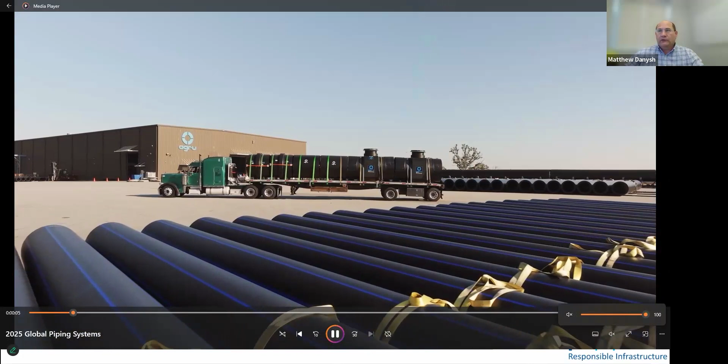Hey, my name is Matthew Danysh. I'm with Agru America. Agru America is honored to be a sponsor of this PE Alliance webinar, and we appreciate the opportunity to tell people about us and about using HDPE pipe. HDPE pipe has been around for a long time and is going to continue. It's basically the only pipe system that's actually growing, where most other pipe systems are decreasing in sales across the U.S. Agru makes large diameter pipe from 24 inches up to 10 feet in diameter for ocean going transport, putting on any kind of truck and shipping it all over the country and all over the world.

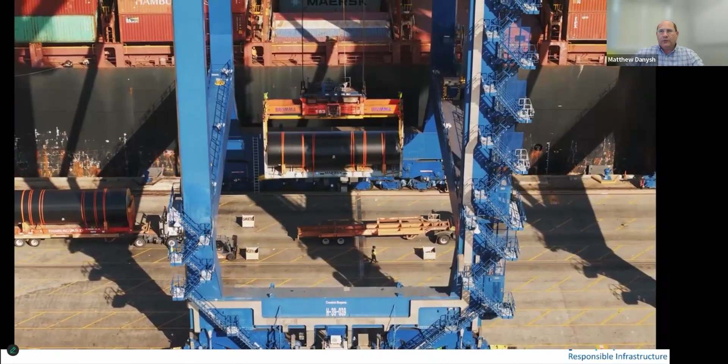Agru's been in business for over 50 years. We've pioneered the large diameter pipe system with the fittings that go with it, including electrofusion couplings and ocean towing across the world and flat racks around the world of large diameter pipe and all different types of piping systems, from potable water to chemicals and industrial plants.

Some of the really cool projects, Matthew, are the fantastic outfalls you've been working on. You guys invited me to your plant last year, and I saw that my first 63-inch DR11 pipe.

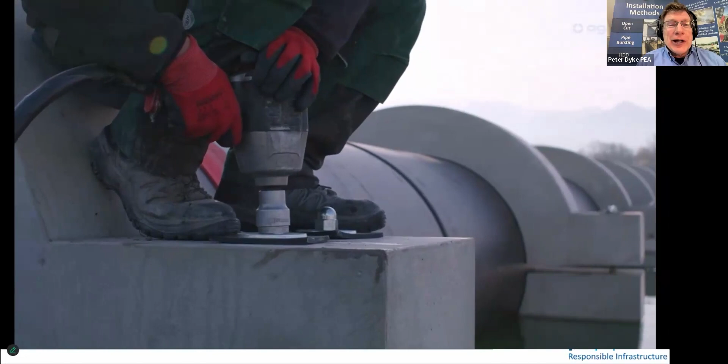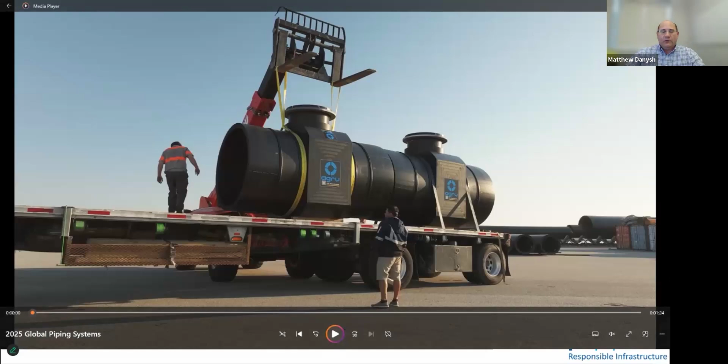Yes, that's another thing—when you're making large diameter pipe, thicker walls is part of the game. So you understand how to make large pipe, you understand how to make thick wall pipe. We first started making large pipe and they said, hey, we can actually make smaller diameter pipe in a great thickness material with higher pressure requirements. So now we're able to expand the AWWA range from SDR9s up to 63-inch.

That's fantastic, congratulations on that. We've talked on this channel a lot about why you have the ability to do that, and that has to do with low sag resin. So we take those resins and extrude them to that thickness, but you've got to hold that thickness. That's kind of half art, half science, isn't it? That is right. It's something you have to understand—how the plastic flows and what it does when it starts to cool. So you have to not only cool it, but hold it properly during that whole process.

We get a lot of engineers on this webinar program, Matthew, and they don't necessarily always pay attention to why—what's the technology behind our ability to make thick wall pipes. But guys like you that educate us, we're so thankful for, because many engineers want to know the why behind the product itself. So that's one of the reasons we do this. Thank you very much.

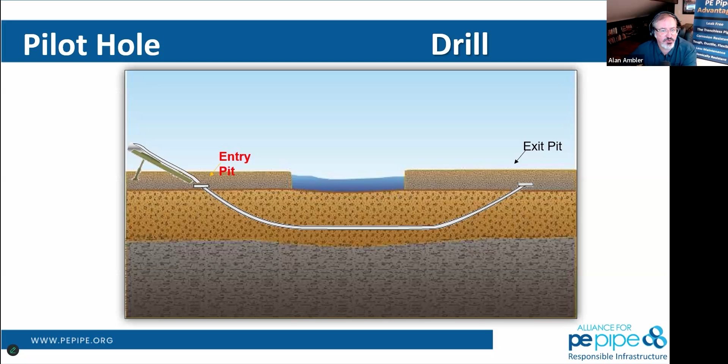Correct. Yeah, normally for a larger diameter drill like the one you're showing here, under a body of water, you would have all that geometry and surveying done before you arrive. And you'd set up either a wireline grid or a gyroscopic locating system. And then the drill rod and the steering tool, as you're shown here, would use that magnetic coil and be triangulated throughout the pilot bore process.

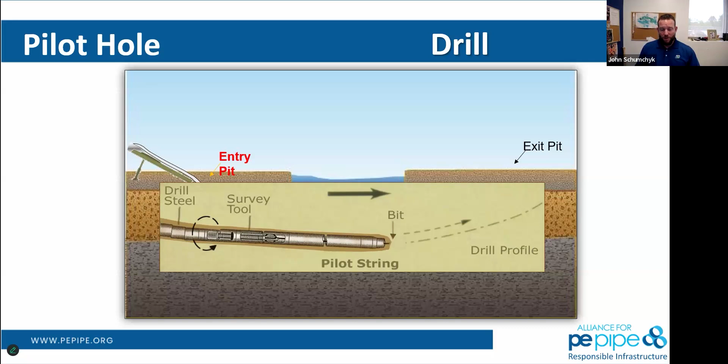So you can, as Alan said, it is steerable. So you're heading down at a 10 to 20 degree angle. When you reach your desired depth, you steer it so it's flat. And then when you want to come back up, you steer it up, and it comes out on the exit side. So it is a very, very accurate steerable process.

Okay, so after that, we expand that borehole, and there's certain mechanisms to do that expansion. Can you elaborate on that process for us some?

Sure. When the pilot hole is done, the pilot tooling is removed, and depending on the size of your product, you install the appropriate size reamer. The reamer expands the ground as you pull it back. And while that's going on, there's drill mud that's being pumped through the reamer. That drill mud actually carries the displaced material out of the hole. So if you'll see here on the back side of the reamer, that large area that's being opened up, all that dirt that was there is being carried back out to the exit side by the drill mud being pumped.

And then it's being sucked up by either a vac truck or a reclaimer, reprocessed to be sent back to the drill so it can be recycled and used over and over.

All right, so that reaming process, we're removing material, correct? And then it stays suspended within some type of fluid, your bentonite or whatever, goes back to a location as to which you're filtering out that material that we're removing, and then continuing through that process. So we're essentially underground taking out material through that, processing it, and removing it from the bore path as we go through.

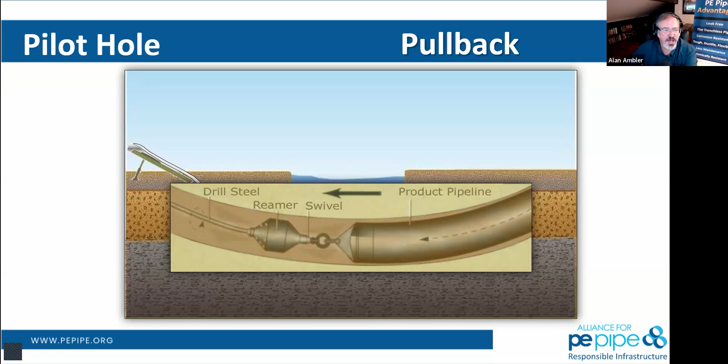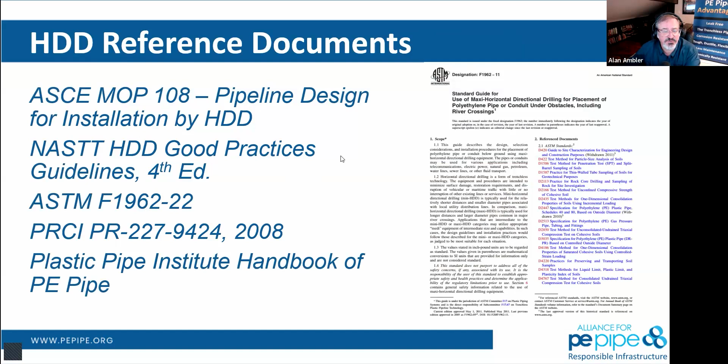There are lots of reference documents covering this technique and these progressions and design analysis as design engineers, before we even get to moving any amount of equipment to the rig. Here's just some examples for you. The PPI Handbook on Polyethylene Pipe certainly gives you good guidance. ASTM standards do give a pretty good guidance for you as well.

And then what that friction force will translate to us is an allowable tensile force within the pipe. That tensile force comes from the industry itself. That's very well known from all of the pent testing, all of the testing to give us the hydrostatic design basis. And then it directly translates right to the allowable pull force for us within the cross-sectional area of that pipe. So again, we have a PSI that is the allowable tensile stress, and then the larger pipe we have, the thicker the cross-sectional area we have of that pipe.

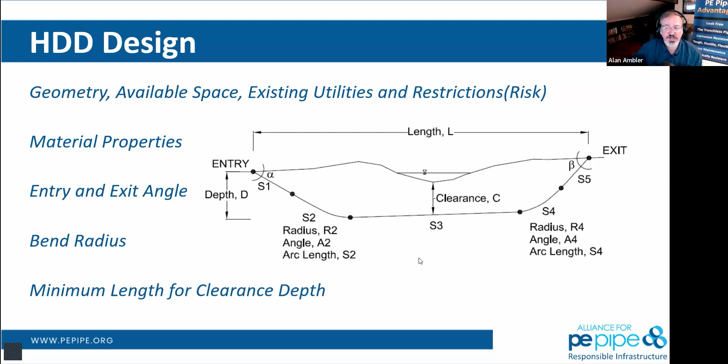So now it translates to a larger force. If we're pulling with smaller pipe, it might not take as much pull force as a larger pipe through that. But these things are all considered when we are designing a directional drill through this process itself, and we continue to go through. So sometimes, John, the biggest thing I see some design engineers do that aren't familiar with horizontal directional drill is to try to have too steep an entrance or an exit angle.

Try to get down as quickly as they possibly can to traverse or cover whatever ground they want. Is that a limitation of the pipe, or of the equipment doing the work for us? Yeah, it's mainly a limitation of the steering tool on the end of the drill rod. The steering tool is probably the most sensitive part of the pilot bore process. It's just a long non-mag connection that can't bend as much as the drill rod can.

The drill rod is steel, you'd be surprised how much it can bend. But the real consideration is about the steering tool at the end. You don't want to damage that, or God forbid, snap it off or twist it off. So the entry angle and the exit angle are two big considerations when designing these bores.

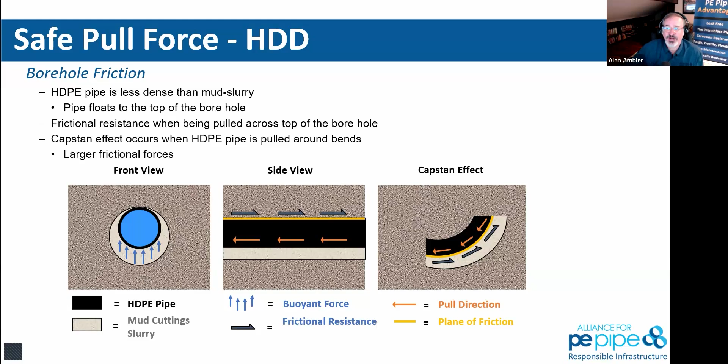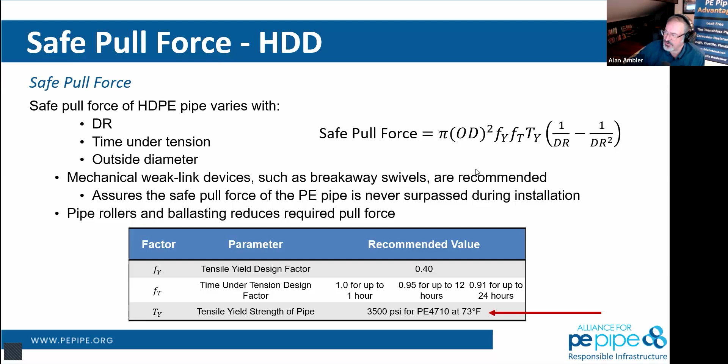The next slide shows what we'd see within the Plastic Pipe Institute Handbook on Polyethylene Pipe for safe pull force. There's an equation for that, and there's also an app for it that you can find online called BoreAid. We may talk about that as well here.

John, you mentioned previously that soil conditions on the existing site make a big difference in how much material is removed or how quickly we can get through things. Something tells me geotechnical is probably pretty important in your plans analysis. Now, if an engineer out there did one boring, or just a simple USGS survey of the soils there, is that going to stop you from doing the drill, or is it just going to increase the price a little bit because of the risk?

Yeah, correct. The more test borings, the better. Right along the drill alignment is preferred, 50, 100 feet in either direction. It could be a big change. One bore on one side is not sufficient. The more information we have, the more aggressive we can get with our bidding. The less information we have, obviously, the more we have to cover ourselves. So yeah, geotechnical exploration is crucial to a successful project.

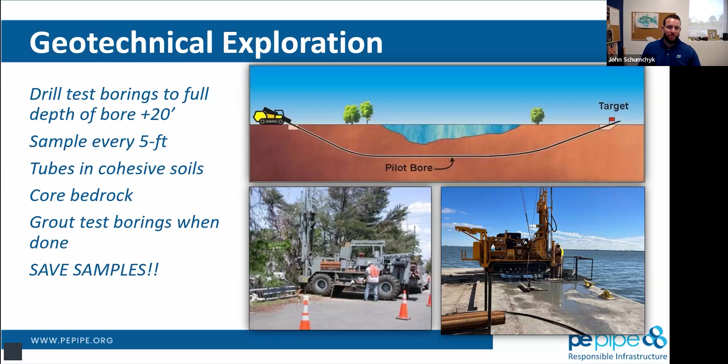We always like to say the more the better, and if you can get borings down 20, 25, 30 feet below where we're going to install, that's preferred, because a lot of times these drills have to be redesigned for whatever reason. Insufficient geotechnical information can really cost the project and the owner.

So that's a boring from which we take samples of the soil throughout. We're looking for changes in condition, because the reaming head's ability to push through the soil may very well change the type of reaming head they actually use through this as well. Can you walk us through some of the risk considerations? I've got another question here for you.

Sure. The largest risk consideration is always your inadvertent release, or IR, frac-out, whatever you want to call it. Essentially, that's when your drill mud builds up pressure underground, finds a path of least resistance, and releases to the surface.

So the frac-out and the IRs are a big consideration in our planning of a project. That's a lot of times what we see when we get a design from an engineer - we'll say it needs to be deeper, or generally not shallow, just to alleviate some of that risk and get the mud to make it back to the rig. If you're shallow in the center under a body of water, it finds an easier path and releases into the water, and you could have a real expensive environmental disaster on your hands.

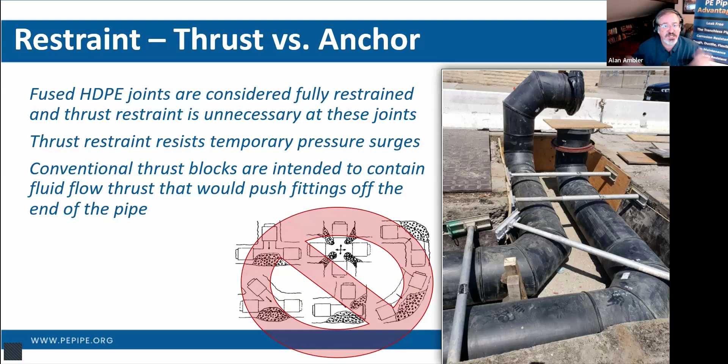But when we're done with the pipe, from a horizontal directional drill standpoint, we want to make sure that it's restrained in its full connection at the tail ends to be able to stop it from pulling out. The mechanisms we have for pulling out from a bell and spigot system on the terminal connections happen to be anchor blocks like you're seeing here, or an electrofusion flex restraint. So you simply put that on the side of the pipe, fuse it onto the pipe, and embed that in concrete. We're going to make sure that any type of thermal effect or Poisson's effect, as you saw in the opening video, does not pull a bell and spigoted pipe system out of its bell and spigot.

Now, of course, big picture wise, you want to be HDPE through the entire thing. However, sometimes design engineers and municipalities want to transition back to PVC, and they would use some of these restraints as we go through.

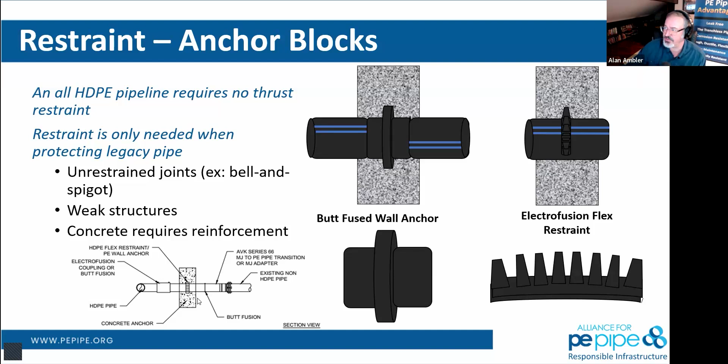You want to tell us about this Champlain Hudson Power Express project? It sounded like it was monumental, and it was a pretty cool thing to work on, especially with the company, right? Yeah, that's correct. So this is the Champlain Hudson Power Express. Can't get really into too many of the details, but I'll speak of what's been publicly released - it's the largest renewable electric project in the country. The general contractor in charge was Kiewit, and we were lucky enough to be selected as one of the 4 directional drilling contractors on the project.

Now, we had roughly 100 drills throughout the center area of the job, all around in and around the Albany area, slightly north of Albany, slightly south of Albany. But it was a great project for us, and yeah, it's coming to a close now - successful on all fronts.

That looks like a heck of a long way to be able to go there, from one location to the next. So that's one heck of an investment to be able to bring all that electricity to New York City and Long Island area.

You're out in Long Island, aren't you? Yeah, exactly.

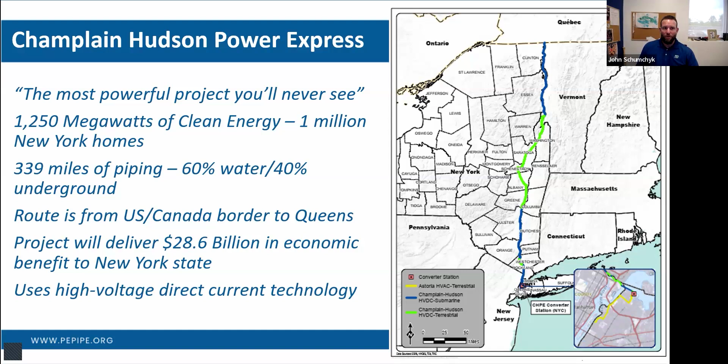Just to be clear, the whole job was not directional drilling. A lot of it was open cut, a lot of it was strung in the river, and the directional drilling was just to get in and out of the river or cross a body of water or sensitive area.

You can't do a project like this without lots of different mechanisms through it. It takes about 6 hours to drive that route, so there's a whole lot of ground to cover, and a lot of interesting project considerations to get from point A to point B.

That technology we have with horizontal directional drill is going to minimize that environmental impact and do a lot of those great things that trenchless really brings to us.

Not only that, but it was pretty aggressive, wasn't it, John? Yeah, it was. All the contractors had a performance clause, and completion and project success was definitely at the forefront in everybody's mind the whole time.

That's a lot of pipe to get in place and a lot of construction to be able to put in a small amount of time.

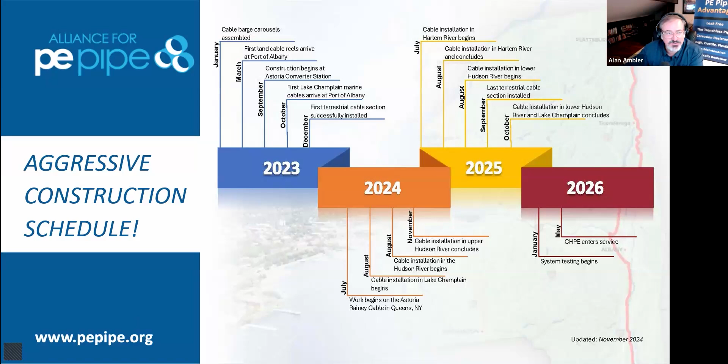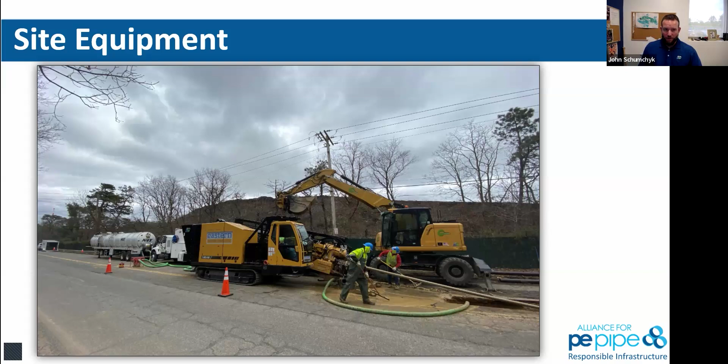You can't see the cleaner in this picture, the reclaimer that's in a parking lot next door, but the mud would be trucked to the reclaimer, then cleaned and trucked back to that silver tanker trailer, pumped into the tanker trailer, and then pumped back to the drill. Then back to the cleaner, back to the drill.

Some intelligent people within our industry have asked previously, if you're going to do something for the most difficult installation, why don't we just use HDPE for everything else as well? But sometimes it doesn't work that way.

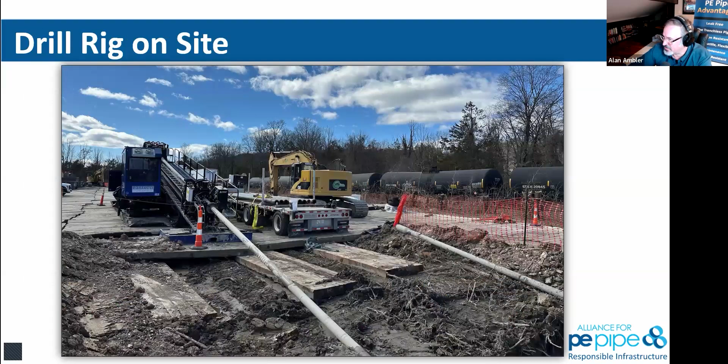Let me get to the next picture. What are we looking at here? This is a drill rig on another site up here in New York. Just drilled under a river, and that is the end of the ream. That's the reamer there, with the product pipe just sticking out of the mud after a successful install.

To answer the individual's question from before, everything's as level and as straight and as flat as we can get it. We try to keep everything organized, clean, and safe.

So here I see this attachment on this backhoe. This is something special for the drill string to load it up into the machine, correct? Yeah, that's called a deckhand. That grabs the drill rod. The drill rods are all lined up on the ground there, and as the drills get either drilled in or pulled out of the ground, that grabs them off of the rack and either takes them off or puts them on the drill.

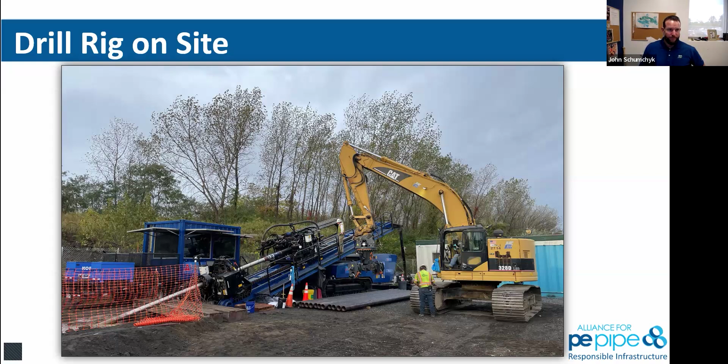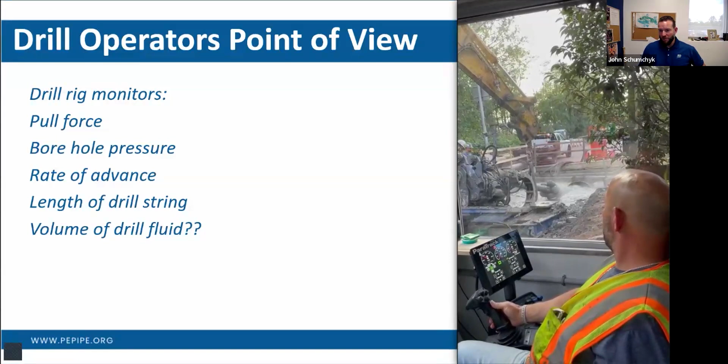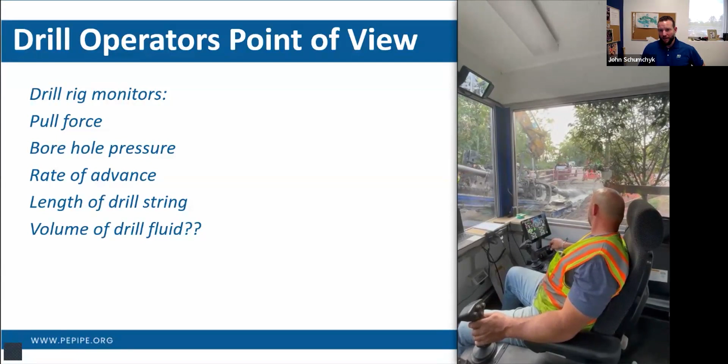All right, so here's a video. Let's see what we're looking at here in this scenario, go ahead and talk through it. Yep, this is from inside the drill cab. This is the operator as we're finishing up an install in rock in New York City. This is the view the operator has the whole time. You can see the white part there, there's a better view of it. He's able to see the whole drill rod going up the rack, and you can see the vices moving there. If you take a look at that reamer, that's a rock reamer.

Talk about ground conditions—every ground condition requires a different reamer, and it can really affect the pricing. So knowing what's in the ground before we start is critical. Some of those reamers could be 3 times what another one costs. So really, to alleviate the stress on the job, the more investigation into the geos, the better.

So that circles back to what we talked about earlier, that a geotechnical investigation gives the contractor and the drilling subcontractor the ability to understand what's in the ground, surface conditions and underneath the ground, which we don't always know.

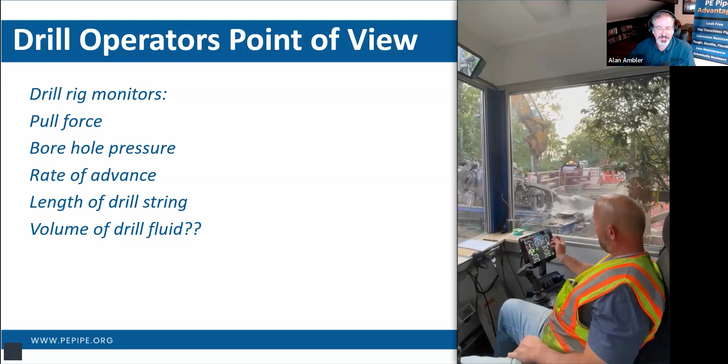In this particular one, I believe when John first started talking to me about this project, the time it took to put a single drill string or drill rod into the ground through this particularly hard ground condition just made my eyes go like this. Like, really? What was it, like 30 hours? I don't remember, it's been a while for me now. But yeah, this was some of the hardest rock, definitely for me, but even a lot of our staff who've been in the industry for 20, 30 years said it was the hardest rock they've ever drilled through—and in New York, go figure, right? New York City. Yeah, 30 hours per rod.

The whole project, don't quote me, but I think it was 3 or 4 months of steady drilling to pilot out and then open the hole, 1,600 feet.

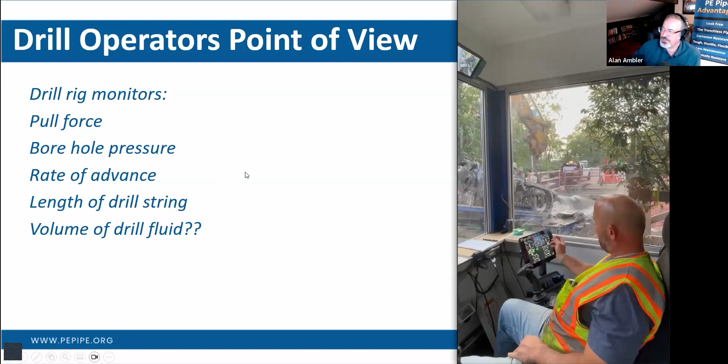All right, we've had some really good questions. Hopefully all of this nuts and bolts type of discussion helped get through everything in that process.

We had some questions as to why the pipe wasn't allowed to touch the ground. Sometimes various municipalities or clients have specifications where they didn't review the Alliance for PE pipe specifications as part of this, and they have other understandings or preconceived notions about HDPE through this process. Just to make it easy and level the playing field, HDPE has the most forgivable allowable bending radius of any pipe material type. With steel, you'd often go through a lot of extent to properly install it and not stress its allowable bending radius. But any gouge on the surface of an HDPE pipe, if it's beyond 10% of the wall thickness, we'd have to cut that section out. Different clients require different things, and John just wants to get a project done at the end of the day.

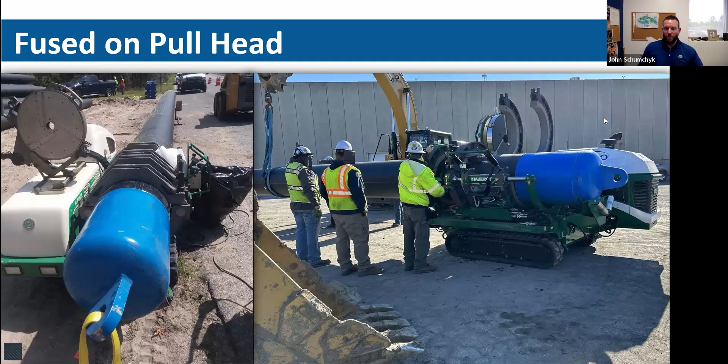So you're just fusing on the pull head right here. Is that right? That's correct. The picture on the right is the pull head being fused onto that pipe we just looked at in that reverse curve. Okay, perfect.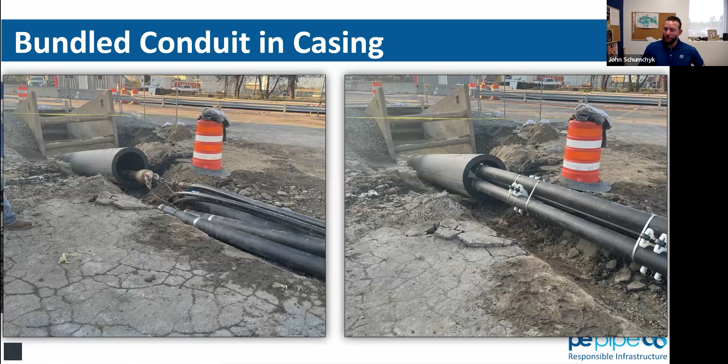And what are we looking at here? This is the same job, casing pipe, with large pipe on the outside, and the carrier pipe bundle is being dragged through. The customer wanted a carrier pipe, casing pipe configuration. So we pull the big pipe in, push the drill rods back through, then pull the little pipes through the inside. You'll notice on the photo on the right, there are rollers banded together, banding the bundle together. This is just how it was designed, so that's how we installed it.

Okay, that's right. Sometimes we just don't buck what they want to do. We just do it, right? That's right. All sorts of things capable here.

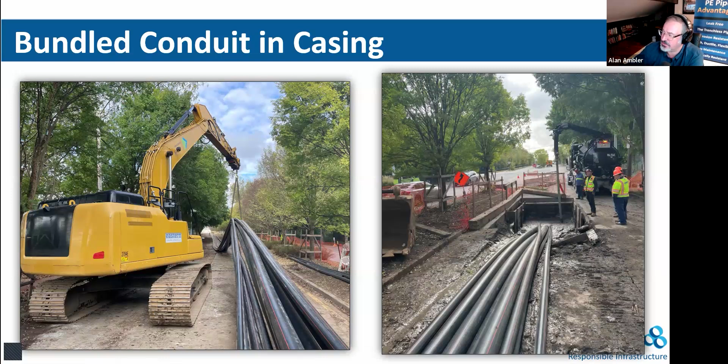So here's the same type of principle that we had just discussed. Now we're just translating that allowable tensile force across multiple pipes as we pulled this through. Once that bore path is established through that drilling process and we get through that rock John had talked about, sometimes these lengths of bores are pretty typical as we're coming through, and we're not going to damage that product pipe in any way, shape, or form.

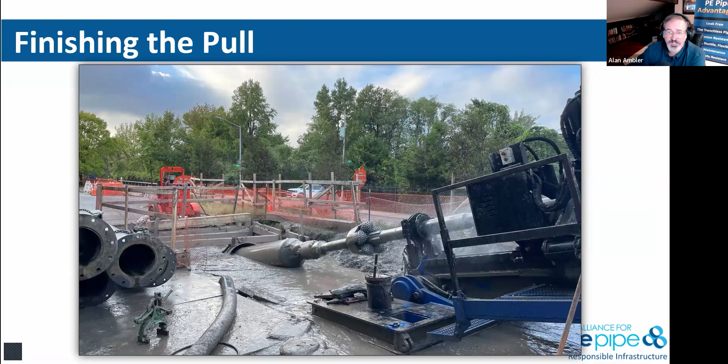I'm going to cruise through pipe bursting, compression fit, and slip lining pretty quickly, and then we'll have time for Ryan to be able to cover a lot of different ground for us.

So pipe bursting is another trenchless technology method that basically does three things simultaneously. It fractures the existing pipe, creates a temporary soil cavity within or surrounding that existing pipe, and then pulls back that replacement pipeline as we go through. That pipe fragment is simply pushed into the 2 to 3 inches of soil that surround that replacement pipe, and it is the only trenchless technology rehabilitation method that can put back a larger OD pipe than what is there existing.

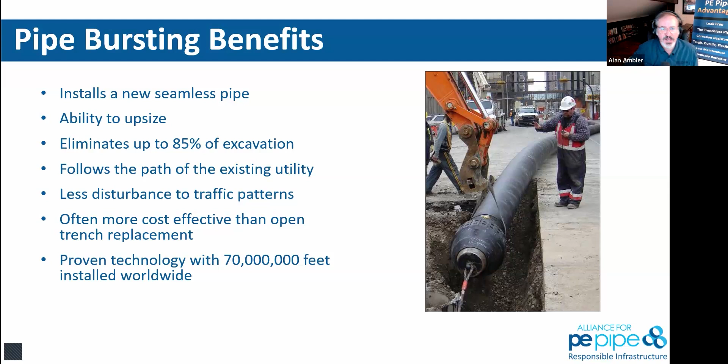So very well proven throughout the United States. A lot of technology done throughout the United States as well. And there's a significant amount of pipe that really is replaced through this method.

British Gas studied these first pipe fragments by overpulling a meter-long section of pipe in front to see if those cast iron pipe fragments did gouge the pipe, and it did not as it comes through. But it really is just as simple as you see here. Once you start to burst something, it's kind of like watching paint dry as we come through.

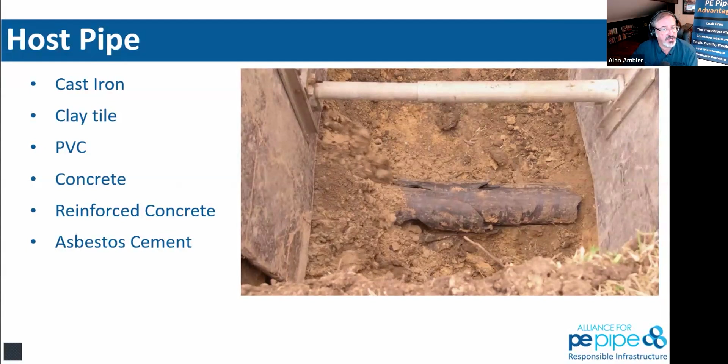What you'll see here on the left picture happens to be a receiving pit, so that's where we're going to put the static bursting machine. Two different types of pipe bursting equipment.

One is pneumatic that uses an impact hammer that's powered by compressed air. That technology only uses high density polyethylene because of the pneumatic movement, as we're just consistently pushing through that.

And static bursting uses a rod to transmit that force, pulls that expander head as soon as it's come to the other side of the pipeline, and just brings back that expander head and the product pipeline at the same time. That's what we're seeing here with this static rig. And then all the way down on the other side, that's when we're putting in this insertion pit.

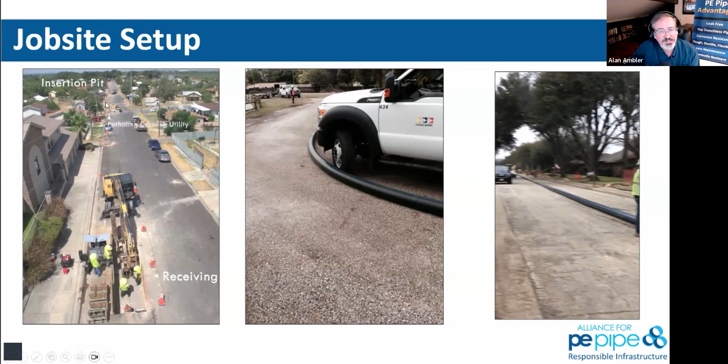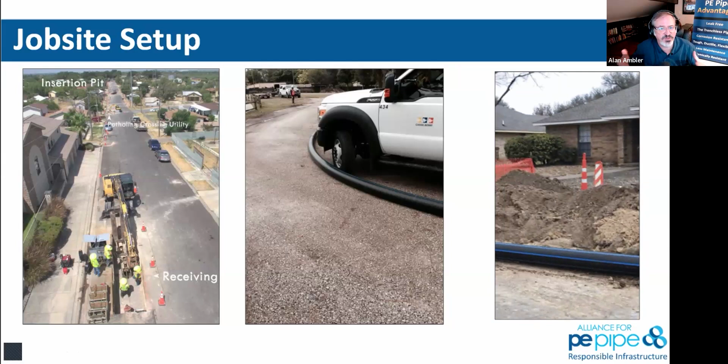So in suburban and urban areas, I liken this to surgical excavation, in the fact that if we had 5 services on this line, we'd have the machine pit that's about 4 feet by 8 foot. If we're in the 3 to 5 foot depth range for the pipe, on the other side, we're going to have a 4 foot by 4 foot pit for the pipe to get in. And then each service connection is only going to be about that same size.

So if we have a 1,000 foot run, we're really looking at about 32 feet worth of excavation throughout that whole process. And we're going to use HDPE's ability to be long fused runs in advance to be highly productive.

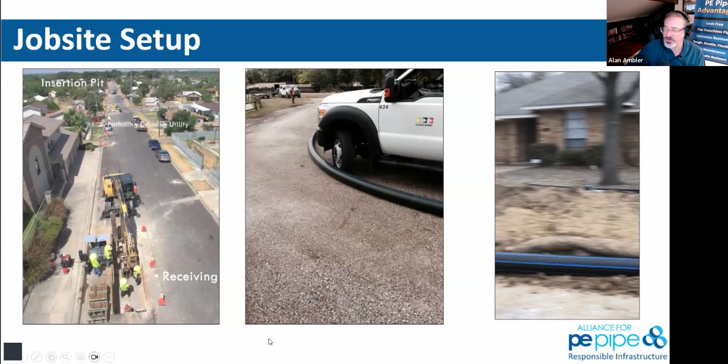It's very routine to be able to fuse up 500 feet to pull in at one time from an offsite job area itself. And then you'll see in the video on the right, this is actually moving it from that laydown yard all the way through this process to the job site.

That's a temporary thing as we go through. The industry itself has productivity tools and equipment to make sure that you can get one crew member fusing up very long runs of pipe to be able to do this.

What you're looking at now is called a pre-chlorinated pipe bursting process, where we are disinfecting and pressure testing that pipe in advance of pulling it into place by taking 2 days of bacteriological samples that show this pipe interior is in fact free of total coliform bacteria. We're showing that it is properly disinfected.

On the day of the pull, we'll drain the pipe, pull it into place, and flush it again with superchlorinated water and turn it right into a service itself.

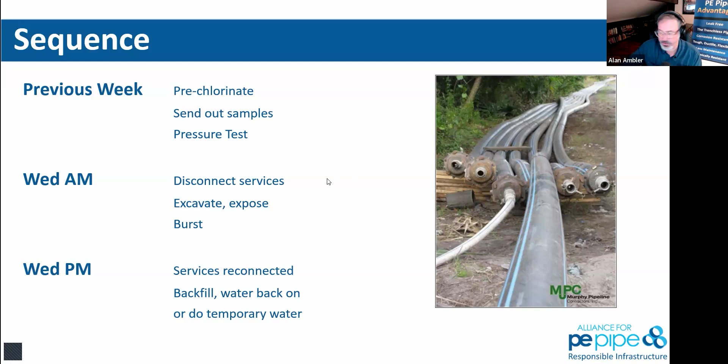So here's a couple of images as the pipe string. You can see the allowable bending radius is very forgiving for us in order to be able to allow us to move this pipe into place easily.

We've got a great question here for us: what type of typical ground heaves can be expected when pipe bursting? Is it contained in the near pipe boundary condition, or does it propagate through the soil column? I'll go right to the answer and then talk about the theory a little bit.

So the industry rule of thumb is for every inch that expander head is larger than the existing OD of the pipe, you need 1 foot of soil to accommodate any ground displacement through that. When we're shallow, all of that soil displacement could be projected upwards. When we're deeper, now we have a lot more soil density and soil weight on top of that column, in which case it'll be directed outward and upward through that process.

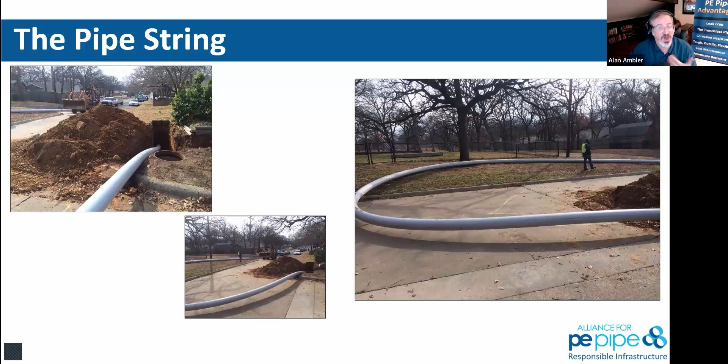Contractors have lots of tricks up their sleeve in order to be able to stop heave as well. I've certainly seen them put a steel plate on surface areas they didn't want to restore, and then park the dump truck right over top of it to push that down. But really, we're looking at originally compacted backfill to be the best soil condition for us. The worst would be a rock condition, in which case we couldn't get that expander head in through that process as well.

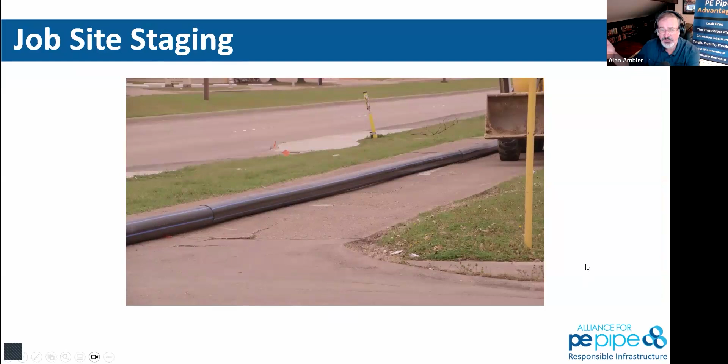Here's simply moving it from the laydown yard to the actual installation itself. The actual act of pushing rods or cable out into 400, 500 feet of pipe could take about an hour. And then the process of pulling all of that back through the pipe bursting process could take about 45 minutes to an hour as well.

So this pipe string is not going to be in front of everybody for that long, because it actually happens pretty darn quick. Most of the work is in fusing the pipe, and most of the work is in restoration and all sorts of other things through that process as we go through.

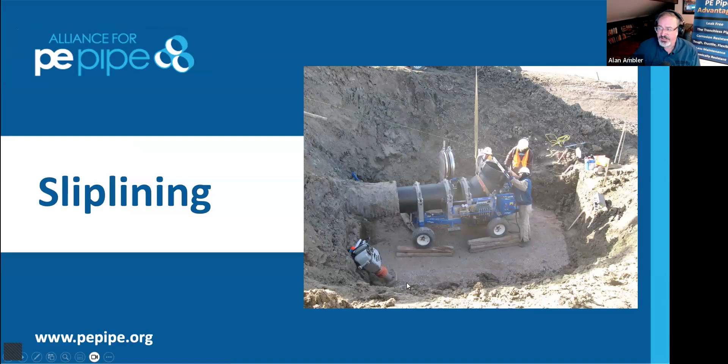Slip lining is very similar in our setup. We need to decommission the pipe, provide access to it. Difference here is we're going to clean out the interior of that pipe, as now we need a properly prepared interior ID to pull that pipe into place for us. So we don't need an obstruction to be able to stop us from pulling that pipe into place.

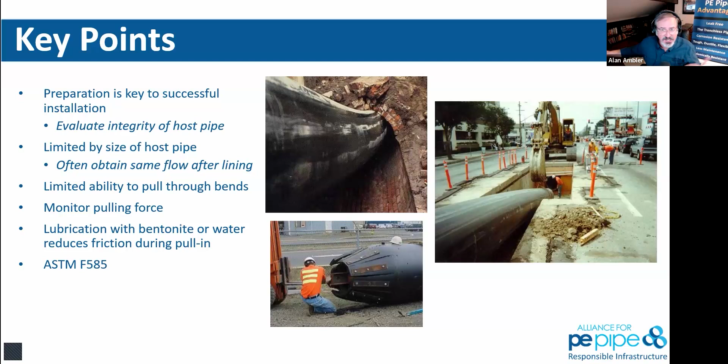So we need it to be properly prepared through that. All of this setup is going to be similar to pipe bursting, where we're going to fuse long runs in advance. Here's just some images and also some video of being able to pull this in place.

What you're seeing on the right there happens to be a reinforced concrete pipe that was in the Miami area that was slip lined. The actual process of putting this 400 or 500 feet worth of pipe happened very quickly through that process. They just started to push it, went in easily, and HDPE is a perfect use for this process as well.

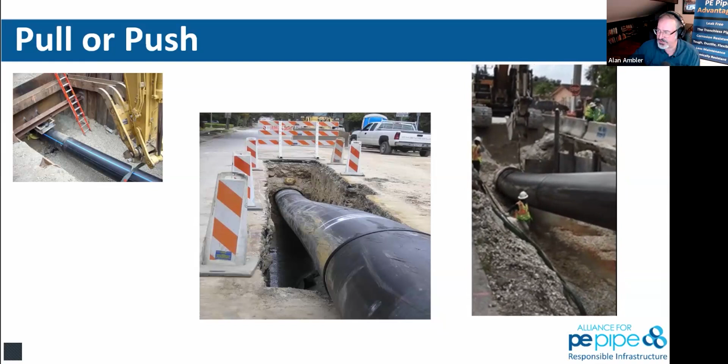Here's a reuse of a pre-stressed concrete cylinder pipe that they thought was failed and lost forever in Sahuarita, Tucson water.

Essentially, this pre-stressed concrete cylinder pipe was leaking, had several repairs. It is 24-inch and 30-inch, so they had simply abandoned it, and then they attended one of our webinars through this process and saw that they could come back through and repurpose this. The story here is it did provide a 10 MGD, a million gallons a day of conveyance for new potable water supply system as we went through this process here itself.

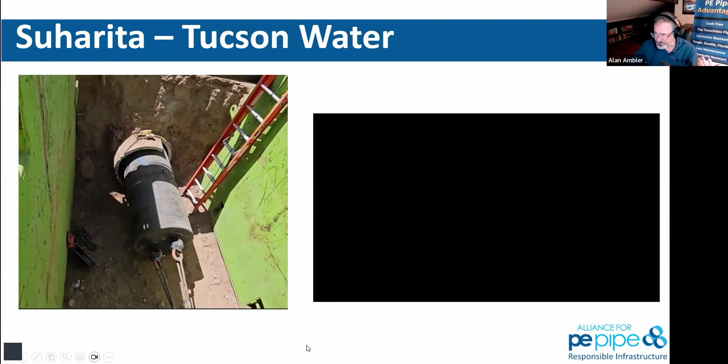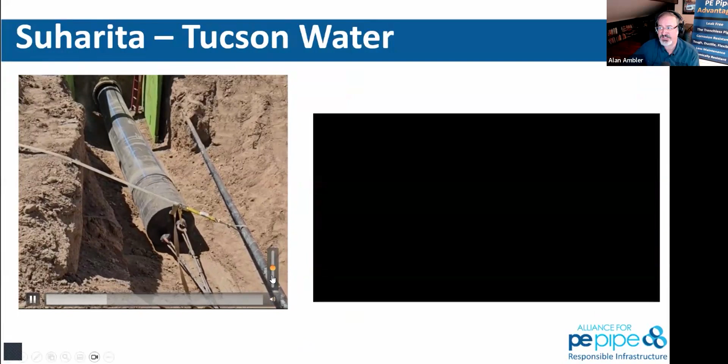These videos are really showing how we're pulling that through a properly prepared surface. We're simply taking advantage of those beneficial properties of high-density polyethylene and its ruggedness and durability. You could see here, we are still pulling it through what otherwise would have been a bend, a fitting in the actual existing pipeline.

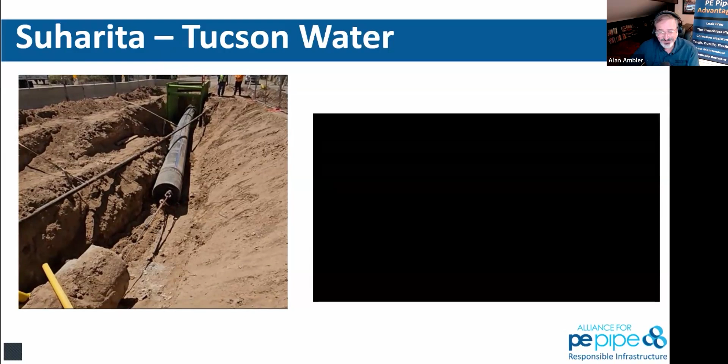They just remove the fitting, they remove the soil surrounding it, and then they're simply just pulling that through that area. We're not stressing the pipe, we are not pushing it outside of its allowable bending radius. And when it's settled, not under stress anymore, it's definitely going to be a happy pipe and not beyond its allowable limits there as well.

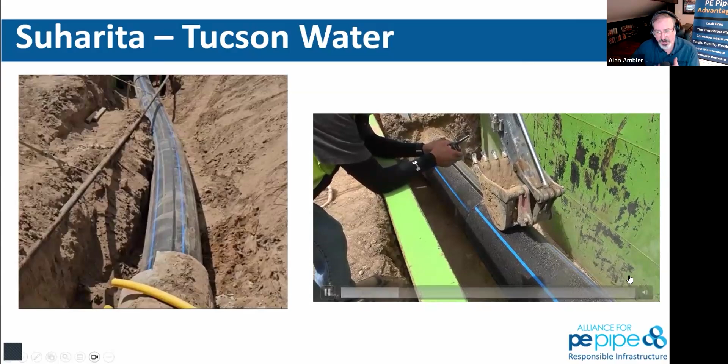So here's another video. We're simply making sure that we are properly aligned and that the ID of the pipe is properly prepared for what we need it to be, pulling it into place, and that's as simple as really that gets in that manner as well.

So compressive fit slip lining is the same thing as slip lining, but we are actually taking the HDPE, making the OD smaller temporarily, pulling it into place, and then allowing it to relax and regain its shape as well. So it does push against the ID of the existing pipe.

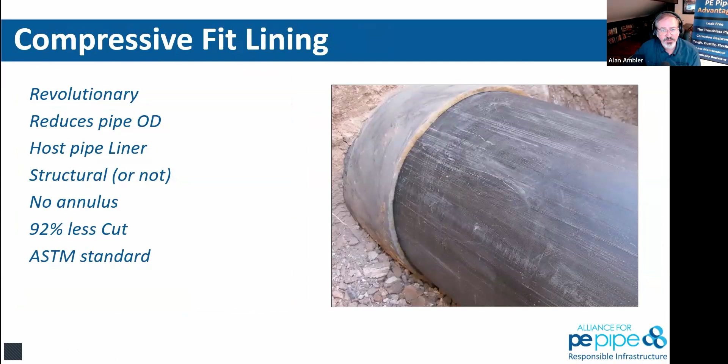A lot of times engineers will look at slip lining and say, well, I don't want the reduced ID. This happens to be the solution for that problem. HDPE is the only product pipe that is used to be able to do that process here.

And here's a very good example of this die reducer itself. So they do spray an oil on top of the pipe to help lubricate this. It is a 32-inch OD HDPE that's pulled into 30-inch cast iron pipe, 29 inches under tension.

A difference between this and pipe bursting is there's a lot of force that's happening at this die reducer, and so it needs to be able to push up against something pretty strong to resist that force as we go through. Here's just another video of this process itself.

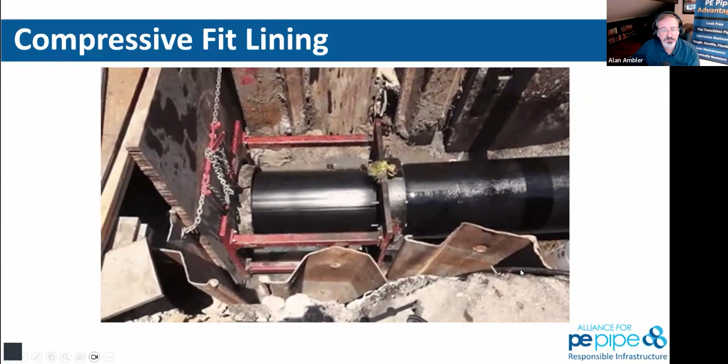This is happening all over the United States—pre-stressed concrete cylinder pipe, reinforced concrete pipe, other things, projects of that nature as we go through.

And there, I'm done. Ryan, you still with us?

You want to take over for, I know we've got about 20 minutes to do open cut, above ground marine, and plow-in, but I know you're up to the task. It's a little daunting, but I know you could maybe talk like one of those guys at the auctions if you need to, right? Ah, I wish I had those skills.

No, we should be able to get through this section pretty quickly. So when talking about open cut, we look at trench width requirements. ASTM D2321 talks about the trench width and open cut standards for HDPE pipe. Here's an example: if you look at this chart, from 3-inch to 24-inch nominal pipe size for HDPE, you're looking at the OD of the pipe plus 12 inches on the width. So 10-inch IPS needs a 22-inch trench, adding that 12 inches to the 10-inch OD to get that 22-inch minimum. A 24-inch bucket would be typical for a pipe of this size with HDPE.

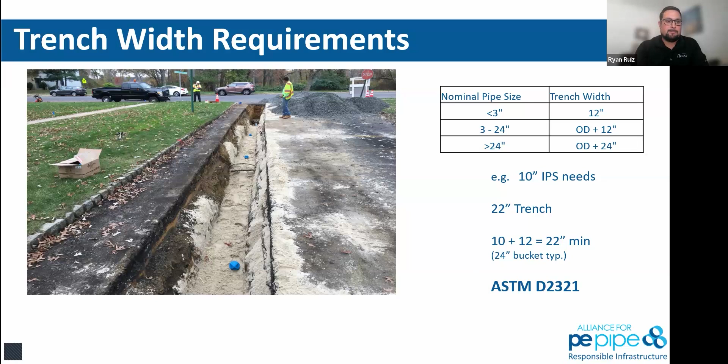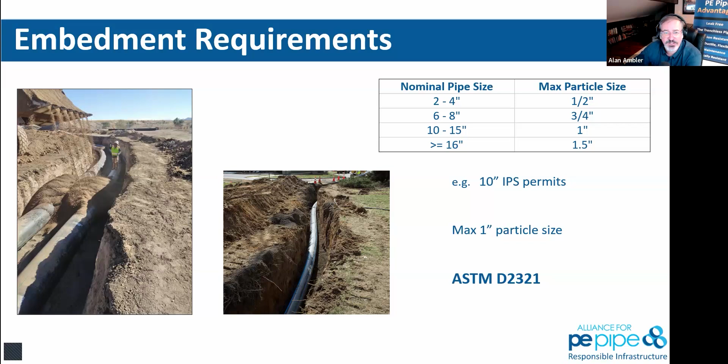I wanted to point out that 6 to 8 inch pipe, as you just said, Ryan. Oftentimes, if we have groundwater in the bottom of an excavation, we'll put down what's called 57 stone. 57 stone is the sieve size it comes through—it's crushed rock or crushed gravel or things of that nature, about that 3/4 inch particle size. So what we use to stabilize the bottom of the trench is still perfectly usable along a 6 to 8 inch pipe, and it's not going to hurt that pipe. That's one of the reasons why we call that particular process out. It's very common to stabilize the bottom of an excavation—not for the pipe's sake, but for the people doing the work on the pipe itself.

So keep going, doing great. And you can use that same rock for your backfill around the pipe, correct? That you're putting on the, yep. Absolutely.

So once we recognize, Ryan, that we've got those long install areas of fused pipe, here's another method to really maximize our productivity, correct? Correct. Here you can see the trench has been dug, and the HDPE more than likely is being fused together in lay lengths at a certain length needed for the trench. So while you're digging the trench, you can have a company like ISCO out there with HDPE fusion equipment preparing the HDPE pipe for install. So it's kind of a double whammy of labor efforts going on at the same time that can help potentially reduce the schedule of the job. So pretty large diameter pipe there—it was a great picture on the right.

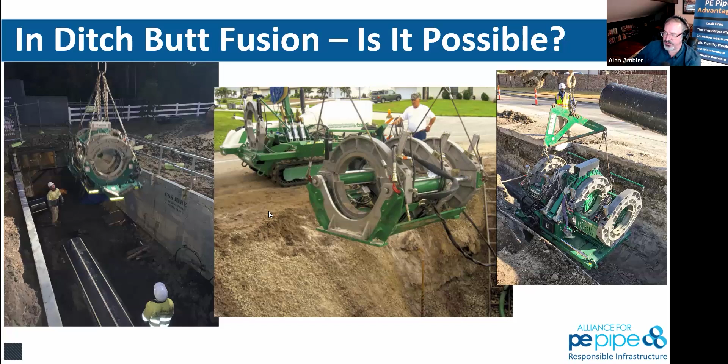All of these machines are in fact designed to be able to be removed from the chassis and lowered down into the excavation for these butt fusions. Yeah, that's correct. That's for those limited access, tight areas where we're able to go down in there and do HDPE butt fusion.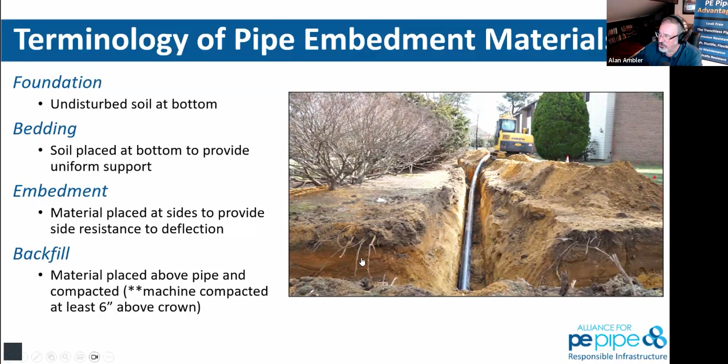So here, AWWA gives us a design window - not this most recent issue. They talk about an engineered installation versus a basic installation, which means the same thing. A basic installation happens to be if we're DR7 through DR21, we have a minimum depth of cover with that box truck loading that Ryan was talking about.

So if you were part of a road show and you see Bob driving the Penske all the way over there, that's exactly what that box truck is, with 10,000 pounds worth of gear coming to you so you can touch it and feel it. That's that 3 feet of cover that we want minimum.

If we don't have that Penske on top of the pipe, then we have 2 feet of cover. And then if you're less than 25 feet deep, you don't have to do anything. You don't have to worry about it, you don't have to do install calculations. But if you really wanted to do the install calculations, just reach out to us, dlandy at pepipe.org, jstevens at pepipe.org, or just send us an email right now. We'll send you over that spreadsheet so you could take a look at it.

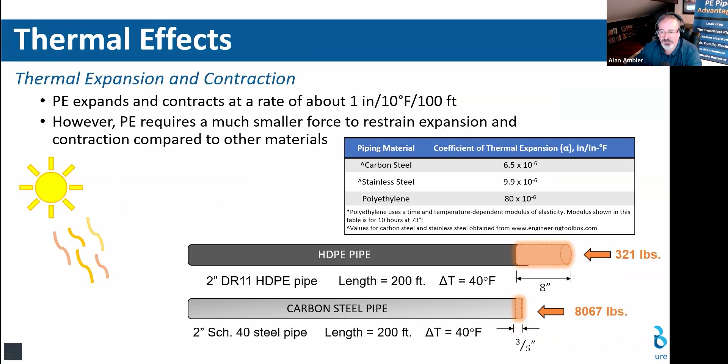So some of the interesting things here, Ryan, that make this type of pipe material different from others, its viscoelastic behavior, but also thermal expansion and contraction. You want to elaborate a little bit for us? Certainly, yeah.

So the way I remember this one is the 1-10-100 rule. PE expands and contracts at a rate of about 1 inch per 10 degrees of temperature change per 100 feet of pipe. So if you're looking at the example for HDPE pipe, you've got 2-inch DR11 HDPE pipe at a length of 200 feet with a delta in temperature of 40 degrees.

So if we go back to the 1-10-100 rule and apply that 40-degree temperature swing, that's going to have a 4-inch change in length, per 100 feet. In this example we've got 200 feet of pipe, so we multiply that 4 inches times 2, giving us a total of 8 inches in growth or contraction.

PE requires a much smaller force to restrain expansion and contraction compared to other materials. In this instance, we had 321 pounds of load between the growth or shrinkage of the HDPE pipe versus carbon steel pipe, a much more rigid, stiff pipe. Same scenario here, but it generates 8,067 pounds of force. So a lot of force there generated versus HDPE pipe generating a much smaller force.

And I believe you talked about earlier some of the restraining methods where we can do wall anchors or electrofusion flex restraints to basically create a thrust block for controlling some of these thermal effects with HDPE. We did, absolutely. So once we have that fully restrained system, any type of change...

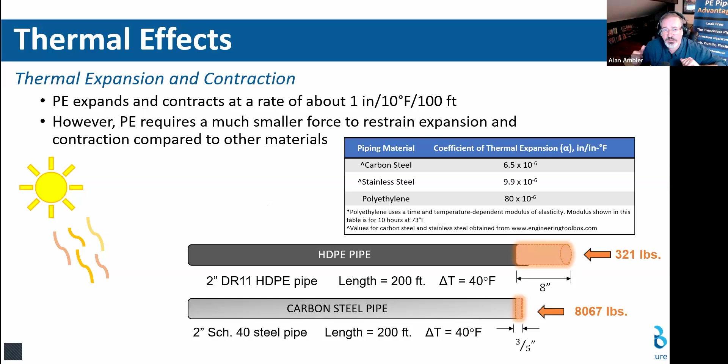So the big thing here is the modulus of elasticity is lower than the other pipe material types. So while it can move more because of that higher coefficient of thermal expansion, the actual force required to stop it from moving is significantly less.

So the phenomena that does this for us is that 2% carbon black entrained in the resin. What it does is it wants to try to move while it's in that pipe wall, so that's actually diffusing that UV radiation. So don't get an image in your head that the pipe wall is moving - that's not what happens. This comes from our chemical engineer people that tell us that all of that's entrained and trapped into the actual pipe wall. But what that does for us is provide us limitless UV protection.

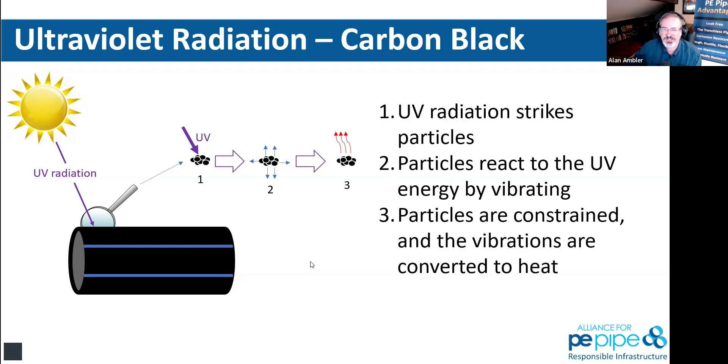So this pipe can be above ground for its entirety of its life, reused and reused and reused in mining operations or sanitary sewer bypass operations and other things. And that is a particular attribute that we really, really like.

So moving straight into above grade here, Ryan, I know you've done some of this with ISCO. Keep going, bud. You're doing great.

Yeah, so we work with some of the temporary bypass providers, whether they're providing potable water, gravity sewer, things like that. You'll have an area of work where there's some rehab where lines need to be isolated or shut down for repair or maintenance. We work with multiple contractors or companies that'll go in and create these above grade temporary bypasses to provide potable water to businesses and homes, providing that sewer and things like that.

So HDPE is not just a below grade pipe. We use it every day above grade as well.

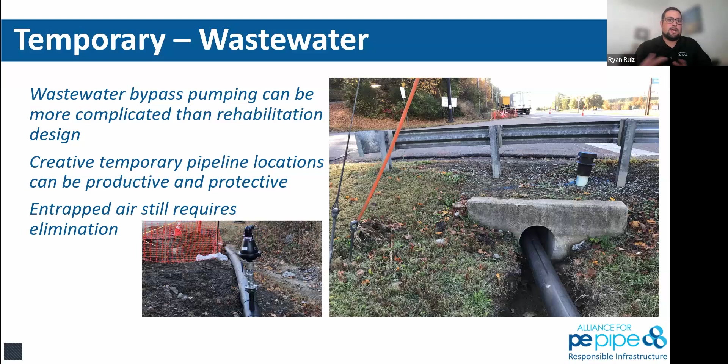HDPE can bend, flex, you can pull it. I think the video earlier showed that excavator just pushing the pipe into the trench without damage to the pipe. So very, very tough HDPE. These temporary bypasses typically are reused pipe where they install, demobilize, move it to another site, reuse it, and just continue to use it over and over again.

So yeah, that picture was a really good one. If you go back to that, Alan. Sorry, yep, we're running about out of time, 5 minutes left. Okay. So no, but definitely talk us through this one because that is it.

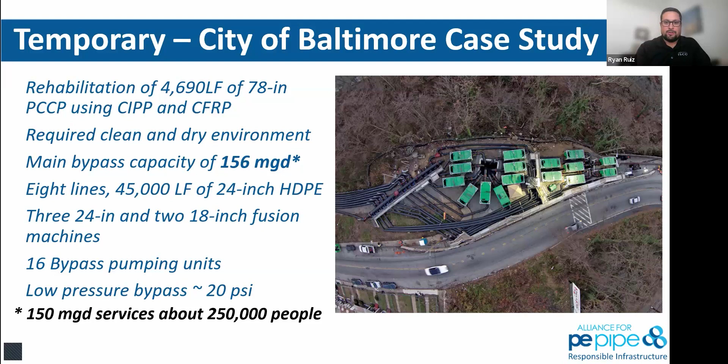Yeah, that was just a great picture of the ability of HDPE pipe with the manifold and just the tight work area. It's a very light pipe for the contractor to handle, so they're able to do these very tight space setups like this with pumps and pipe and valves. It's just truly creative there on what that job did for Baltimore.

Marine is a valuable method when you can't utilize HDD, due to a marsh, swamp, or bayou. I'm originally from Louisiana, so I know a lot about those bayous and swamplands - not a lot of structural integrity, as I found out in my youth trying to walk through a marsh or swamp. You don't float very well, you sink. But HDPE pipe will float.

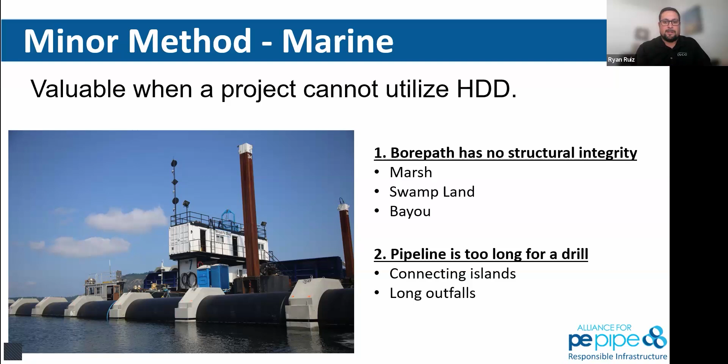Another example would be a pipeline too long to drill, so HDD isn't an option there. HDPE is buoyant, as we talked about earlier. Sometimes you need to fill the pipe void with fluid to anchor it down. With HDPE, you can fuse it together and tow it across the waterway for install. This is really useful when you don't have a lot of laydown space - you can build these pipe strings, put them on a tow, and tow it across the waterway to the job site.

This picture shows these concrete anchors being installed onto the HDPE pipe. So when it's time to fill the pipe with fluid, it'll allow it to sink to the bottom of the waterway.

Good point, Ryan. Hey Alan, one of our friends down in South Carolina mentioned maybe we should talk about those electrofusion flexible restraints. Could you tell us a little bit about the role they play, and how that can be helpful when we're using an anchor block? Go for it, Ryan.

Talking about how electrofusion flex restraints are utilized - they're quite small. They're electrofused, with copper coils within the flex restraint itself, and they fuse to the outer pipe wall. Each one is good for a certain axial load of resistance - some are 7,000, some are 9,000 or more. The engineer determines the total axial load they're wanting to resist in that thrust block, and that's how many electrofusion flex restraints we figure out we need to add. So if you've got 90,000 foot-pounds of force and we've got 9,000 foot-pound axial load on the flex restraints, we'll put 9 or 10 of them.

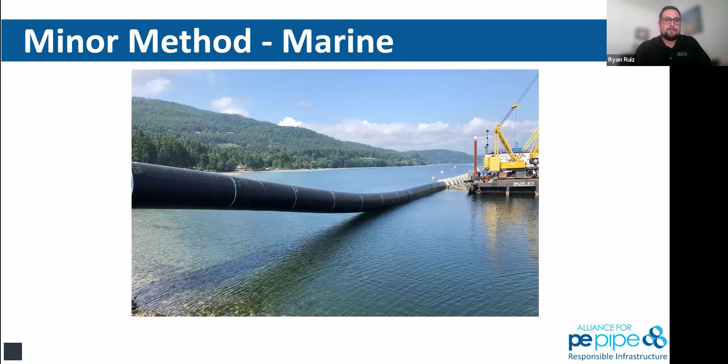Awesome, very thorough - I didn't even have to be here, Ryan. You got it, absolutely - I might have done it once or twice, maybe once or twice.

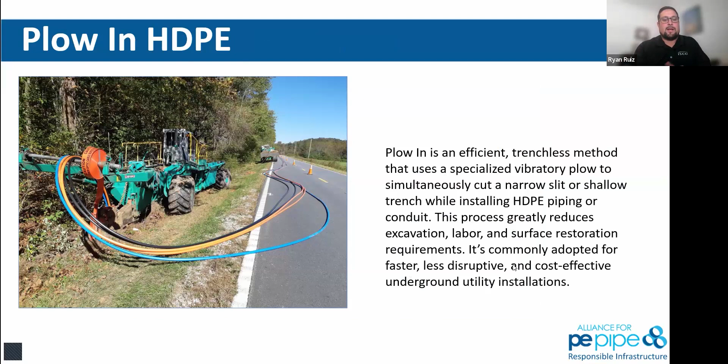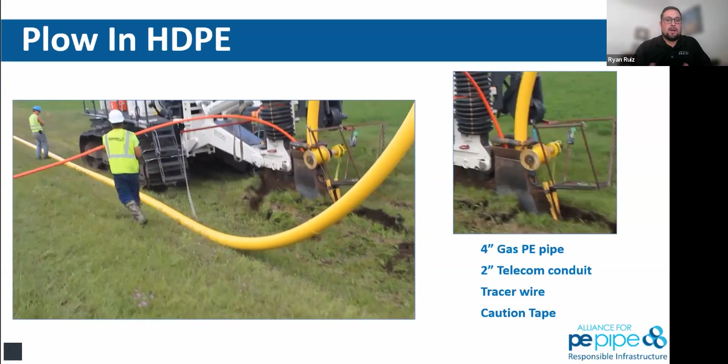Tell us a little bit about plow-in. This is another kind of freak of nature of using HDPE in rural areas. I've yet to do this in my career, but I understand the methods. Like you mentioned, rural areas have a lot of area you can work in, even though this right of way is pretty tight. You're running long stretches of HDPE - miles and miles of pipe - where you can use these plow-in machines that literally cut the trench and lay the pipe in. You can do multiple pipes at once, like a 4-inch gas PE pipe with a 2-inch telecom conduit, while laying the tracer wire and caution tape all at the same time with this plow machine. So there's no open cut, putting pipe in and then backfilling - this machine and operation does it all for you at once.

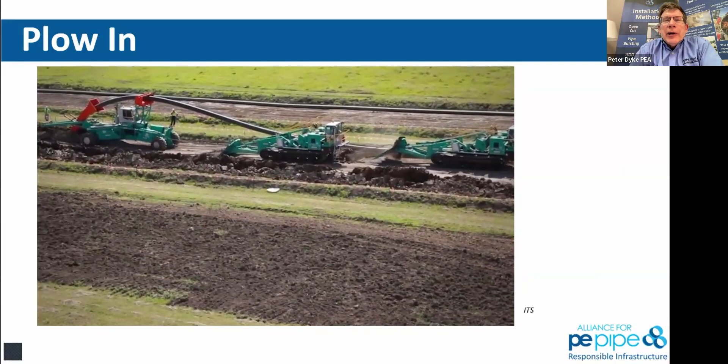It's impressive - look at the flexibility of HDPE there, able to go right into the ground, trenching it at the same time. That'll do 24 inches down to a depth of 10 feet. Look at the scale - the guy in the background looks pretty small next to that equipment.